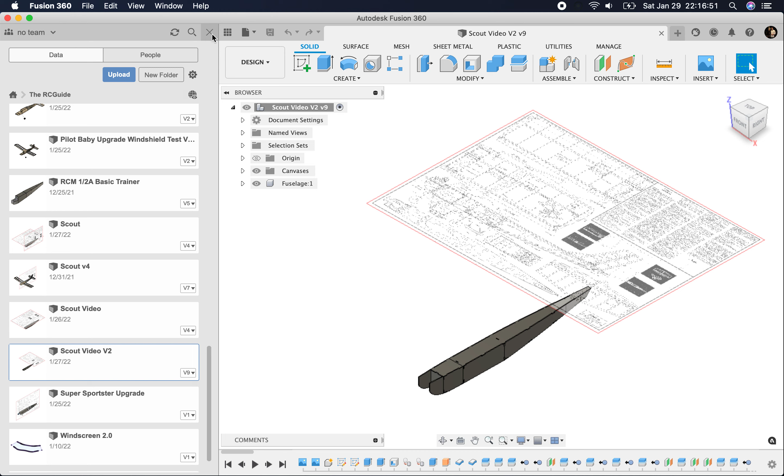Alrighty, we're gonna start working on the empennage here and go from there and move on progress in this little video.

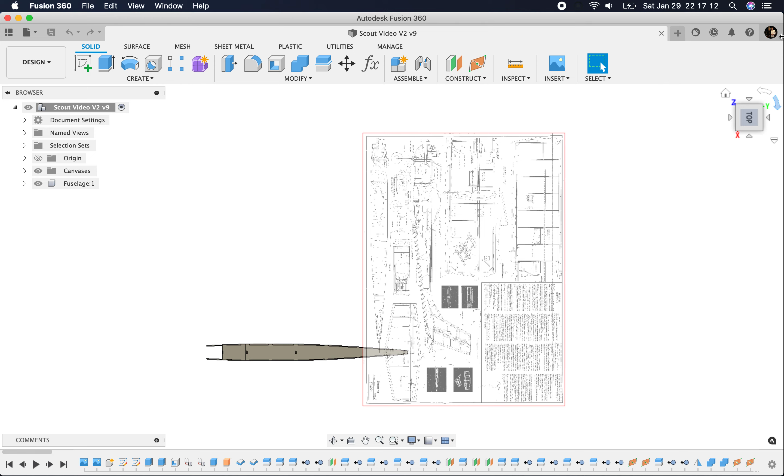Sorry I didn't make it last week. I had some things where I was a little under the weather. I hadn't gotten COVID, but a sinus infection nonetheless.

So I moved this canvas over just to get it lined up with where I want the horizontal stabilizer to be. And I'm going to create a new component up here by right clicking, click new component.

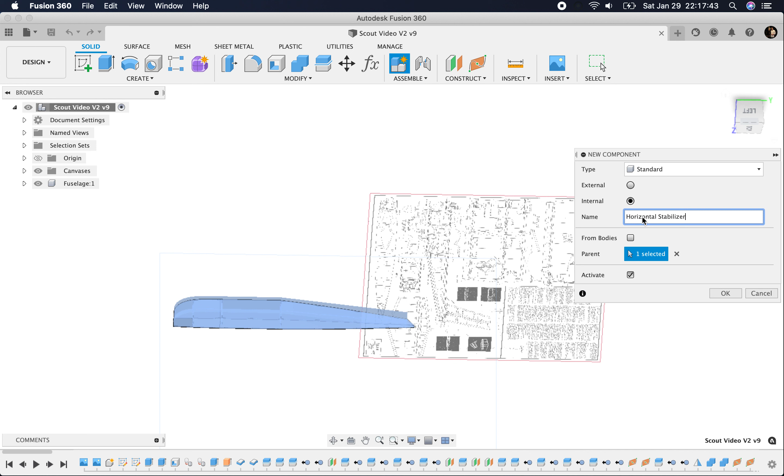Okay, and that's where we're at now. We have that selected. That's where we're going to go with this.

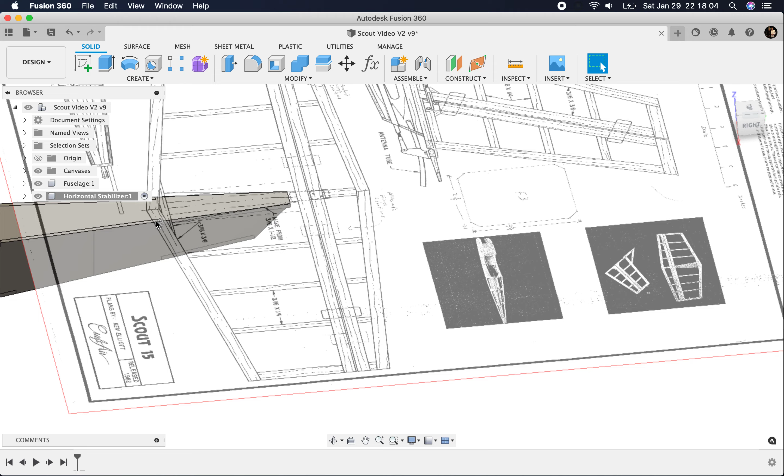Now, I did some things here a little prematurely. This tab back here in the back is actually going to get taken up by the stabilizer, so we'll have to come back and make some more tabs in here, but that's no big deal.

Alright, so I'm going to go ahead and create a sketch right here on this plane, this horizontal plane.

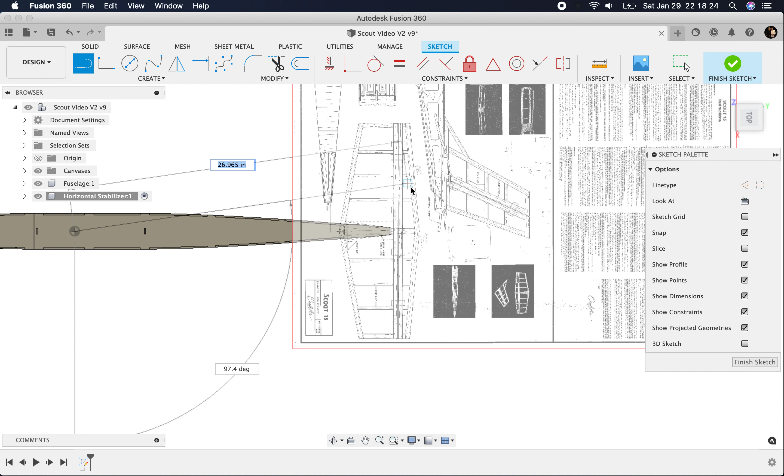First thing I want to do is draw a center line down the middle. Usually when I have symmetrical items, I like to have a center line to work from. We're just going to start our sketch. We really don't need the fuselage body here for this, so we can turn that off.

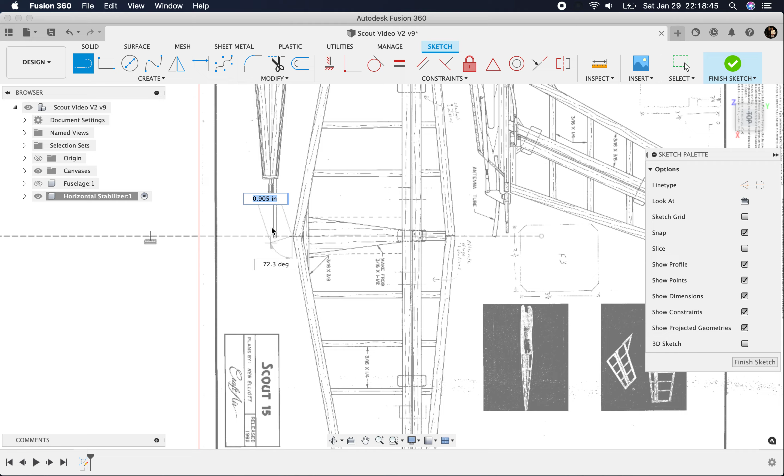Alright, and I'm holding down Command, or you can hit Control, I think, on the PC, because it doesn't always want to snap where I want it to.

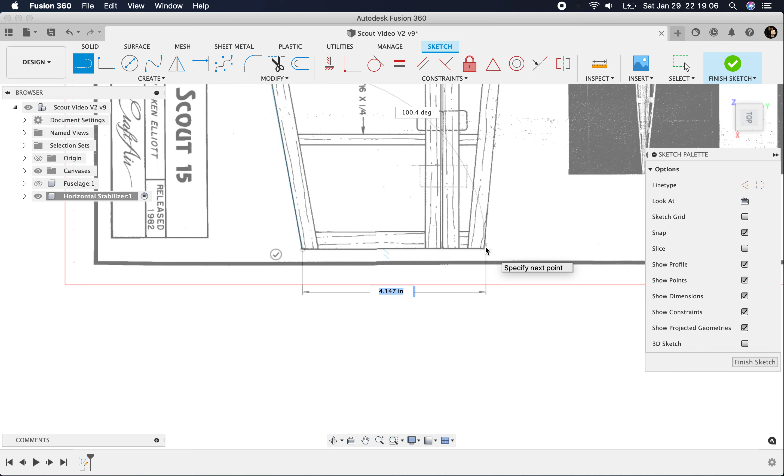Here we just want to go the line. It doesn't want to go where I want, so I'm going to go a little past it, and I'll come back and trim that. I think that's kind of what happened right here.

I got this new microphone, so hopefully it sounds a little better. It is definitely sensitive, that's for sure.

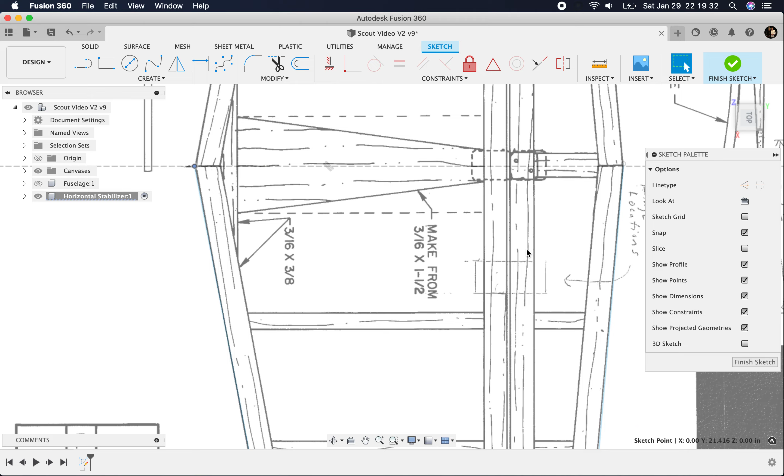Alright, and I'm going to draw this so that it has notches in the leading and trailing edges of the elevator and the horizontal stab, just to make it easier to build where you're assured that it's going to lock in. So I'm going to hit this offset tool.

Come in here and select that, and instead of what the plan called for was 3/8, I'm gonna go 1/2 inch. So you got to make that a negative. There we go.

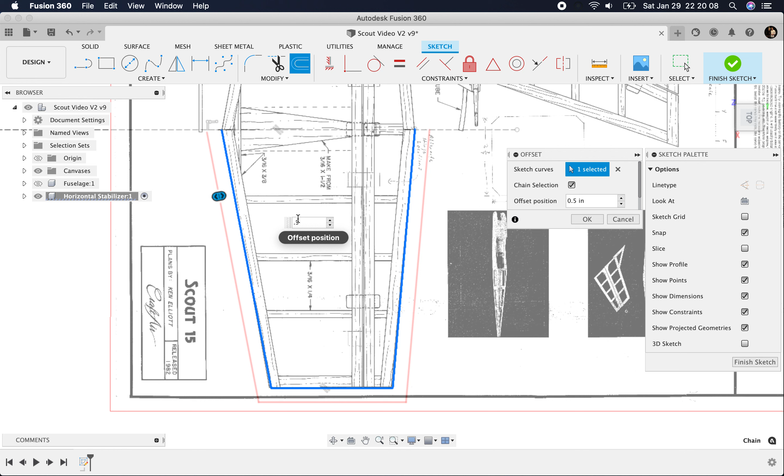And since this is going to the leading edge, usually it goes all the way to the end, so I'm gonna do that there also.

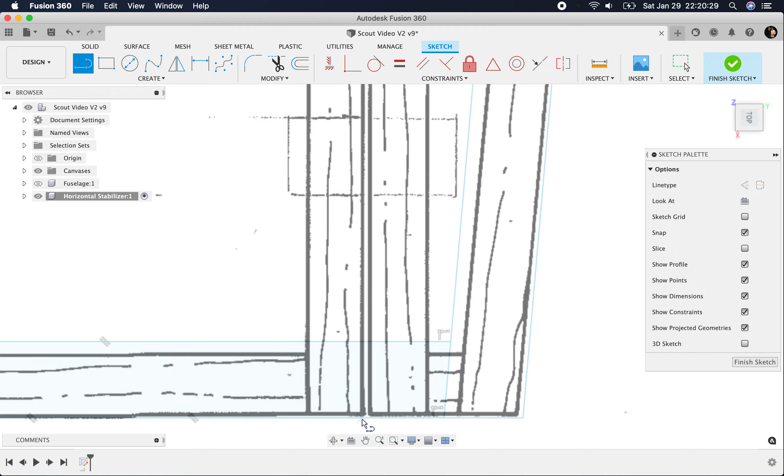And I'm going to come back in and put in our elevator hinge line. You can hear my fan heating up, coming up on my computer. And I'm going to do an offset here, and I'm just going to go 1/32.

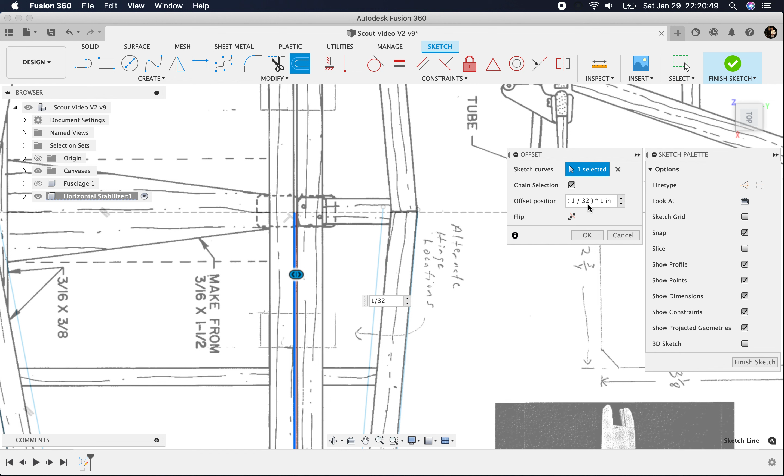And again, the nice thing about Fusion, you can put in fractions, you can put in decimals, you can put in inches no matter what your document settings are. Like mine are set to inches because, yes, I live in the USA. And you could set them however you want and still come back in and put in a different dimension.

Okay, so on the ribs, I want to go in a little bit. So I'm going to offset this again, and I'm going to offset this 3/8. Let's see here.

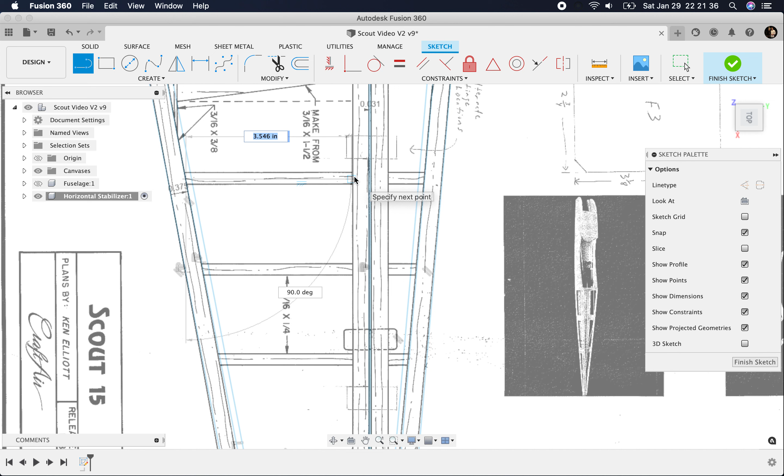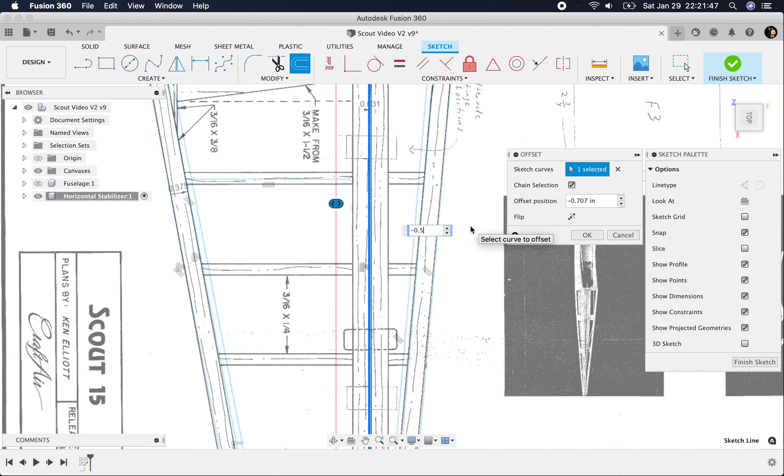Then what I'm going to do is I'm going to take the ribs to that line. I didn't do my offset back there. Make that 0.5. And that works right there.

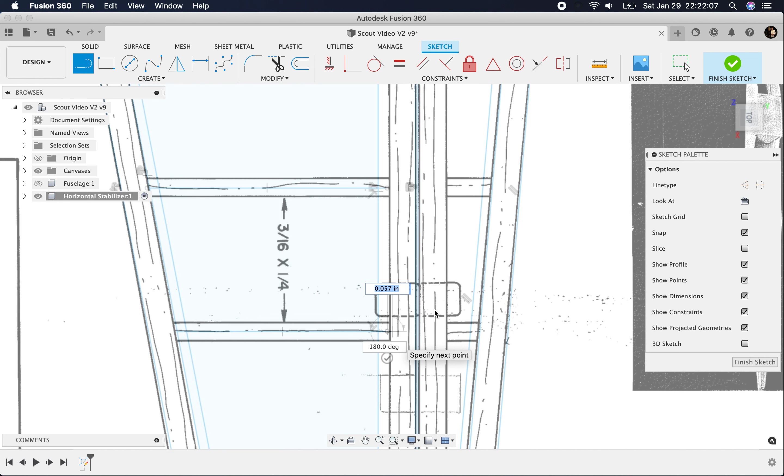And the ribs, I'm gonna do a thin extrude, and I'll show you. It's really simple, and for stuff like this, it's kind of handy. Let's come back in and go to there, that's good.

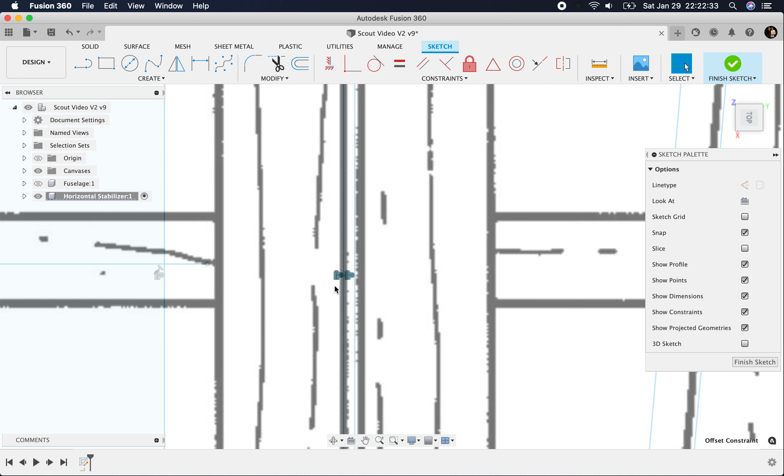And let's do an offset here. One of the things when you do an offset, it won't let you offset an offset line, so you have to break the relationship. You can right click on that, and I think it's here where you can say delete coincident, or you can just click on the little icon there and hit delete, and it is no longer associated with the one that you made it from.

So here we want to go 1/2 inch, and we'll do another offset, 3/8.

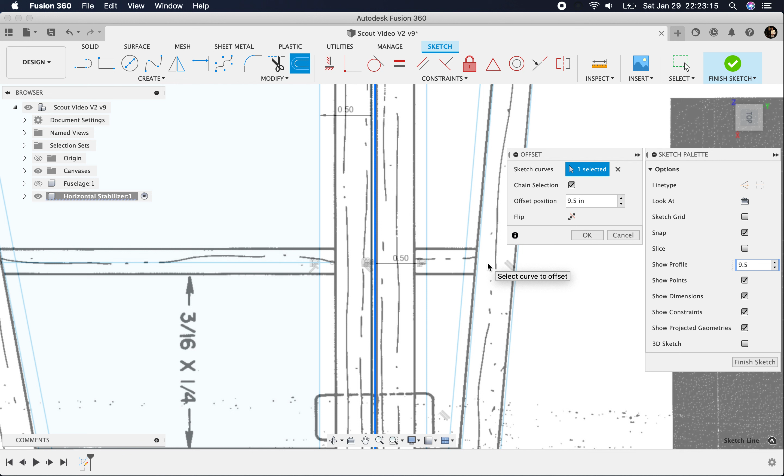Or for all my other people in the world, we'll make it 9.5 millimeters. Change this to millimeters. And that's pretty close to 3/8 for me.

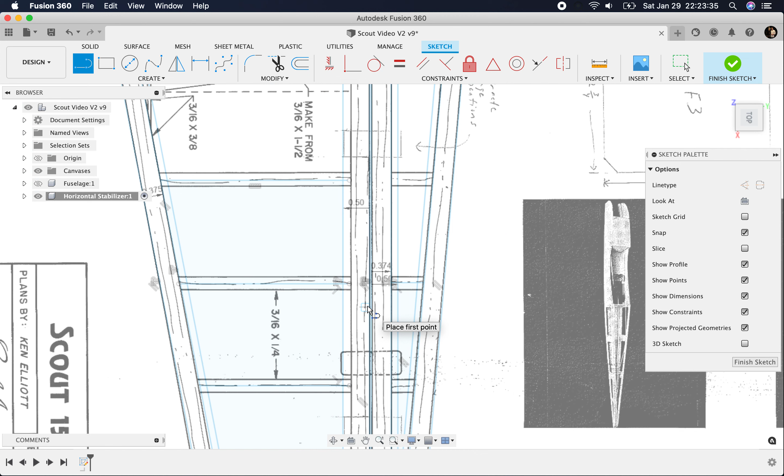And come on in here and draw this. Yeah, that's fine. I was going to say we could probably come from here to there, and that way we know we're lined up. There's just 3 of those.

We could have also done an offset or a rectangular pattern to create these ribs, and later on we may do that with other parts.

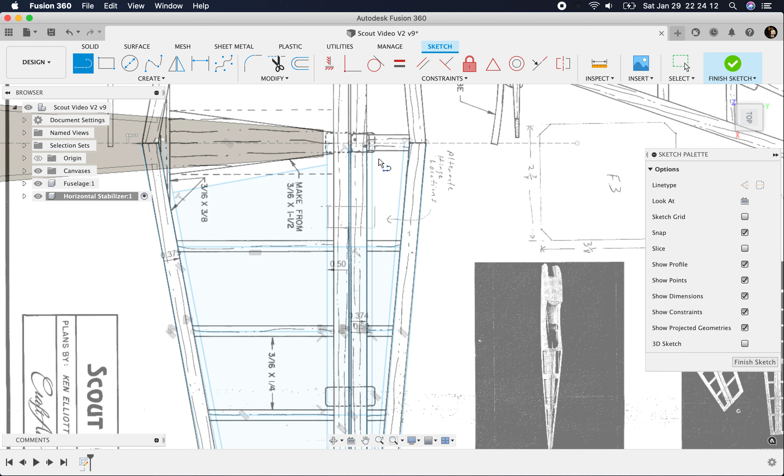Okay, so we just draw one side, and I need to draw this centerpiece. I'm going to do mine a little bit different. Yeah, I like to go a little bit wider just to be good, and I think I'm going to do a little bit different piece back here as well.

That's not what I wanted. It was close. Let's click there and there. Call that good.

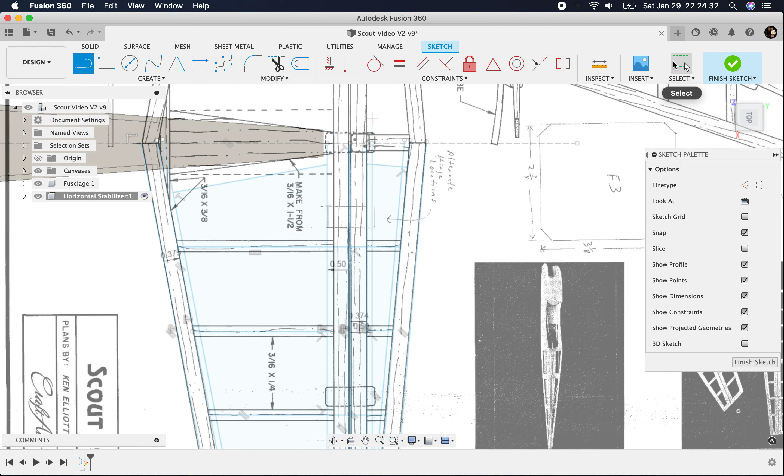And I want to extend this line into what would be our 3/8 line, like we did up here, or 9.5 millimeters. Negative.

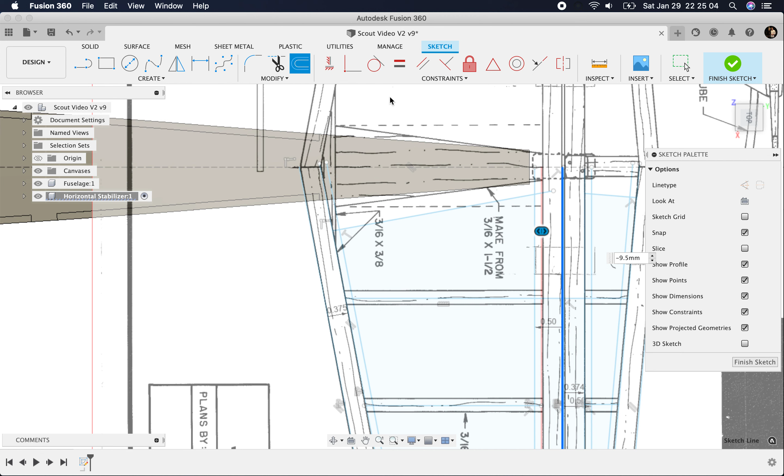I know a lot of CAD programs, once you set up your preferences, you can't go in there and change your unit of measure, but Fusion doesn't seem to mind too much.

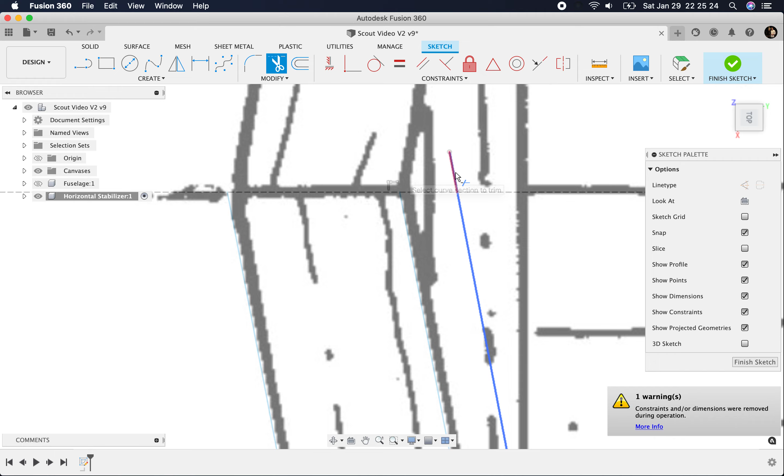Okay, what I want to do now is mirror all this. Let's trim these lines first, where they're hanging over our center line. Make sure nothing else is hanging over the center line. Here we go.

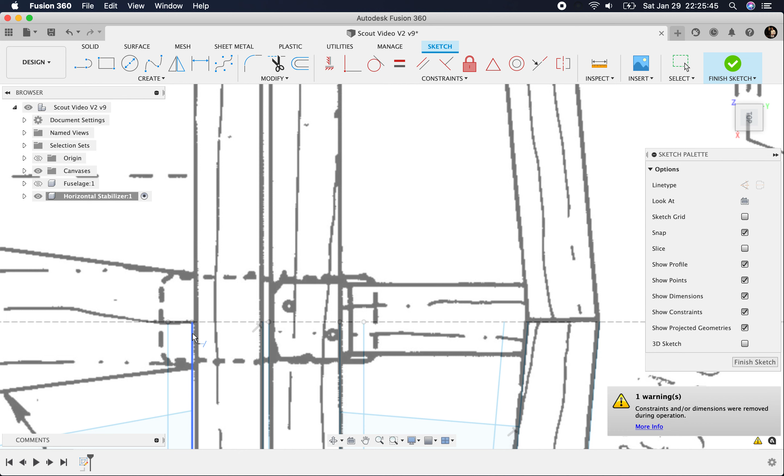And these are either too short or hanging over. Nope, that's not it. And normally when it's touching, you don't get the little point on there. Let's see what happens. So we want to select all of this.

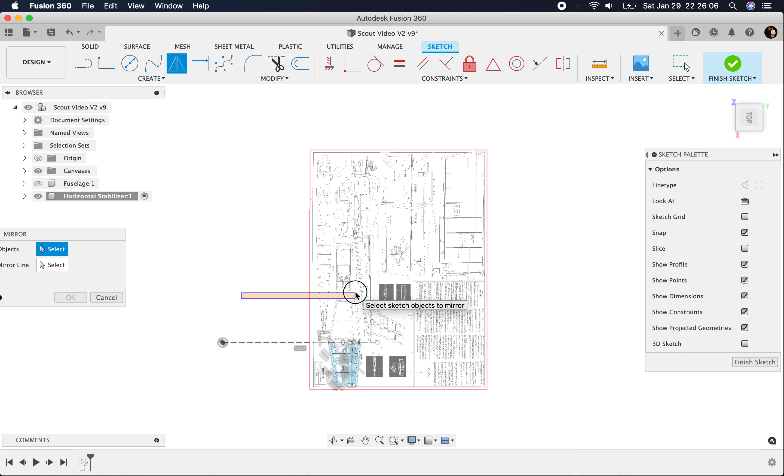Except for the center line. And our mirror is going to be that center line. And it looks like everything is closed, so that is what we want. So that's a good thing.

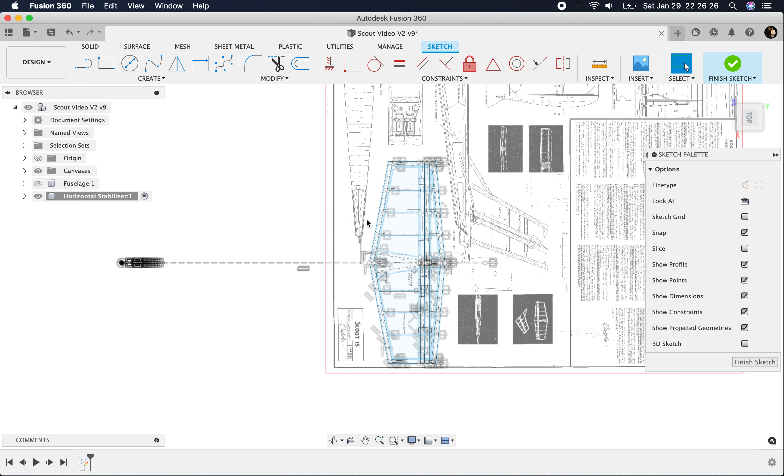Alright, we can finish this sketch. Now this is going to go below the surface of the fuselage. Right now it's on top, so we're going to go down 3/16 of an inch.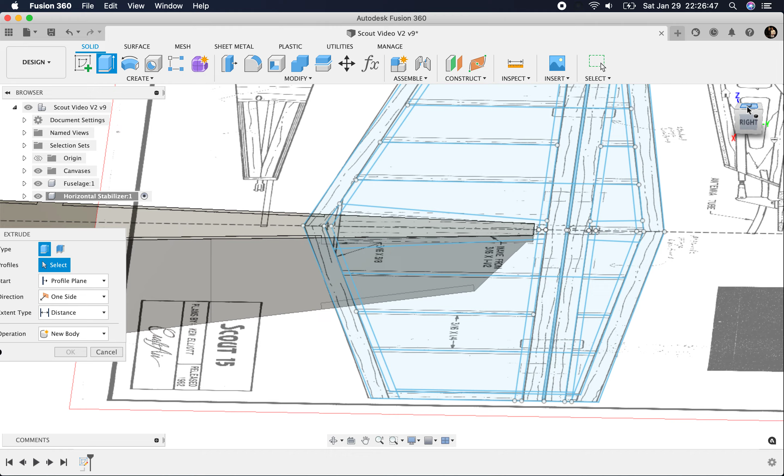So let's go to extrude. You kind of don't want to extrude all of it at the same time because you're going to end up with too many pieces connected.

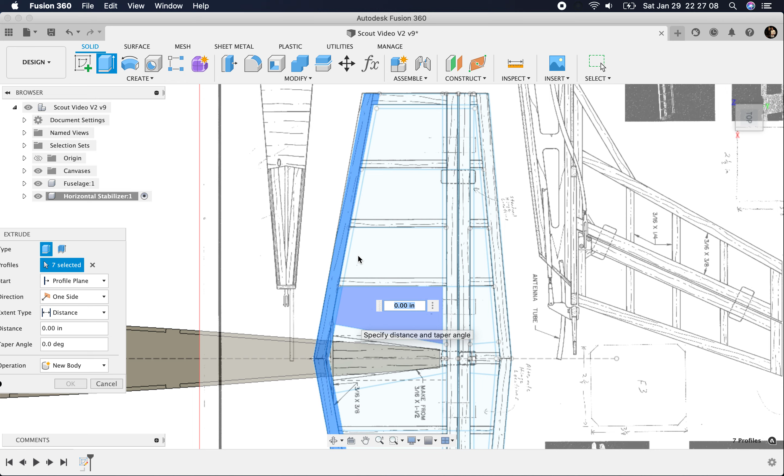I want you to notice where these drawings were not always symmetrical back in the day. So we could extrude that,

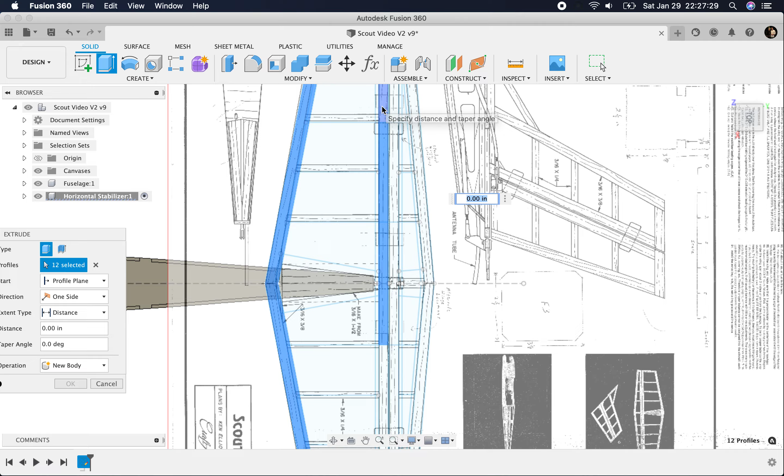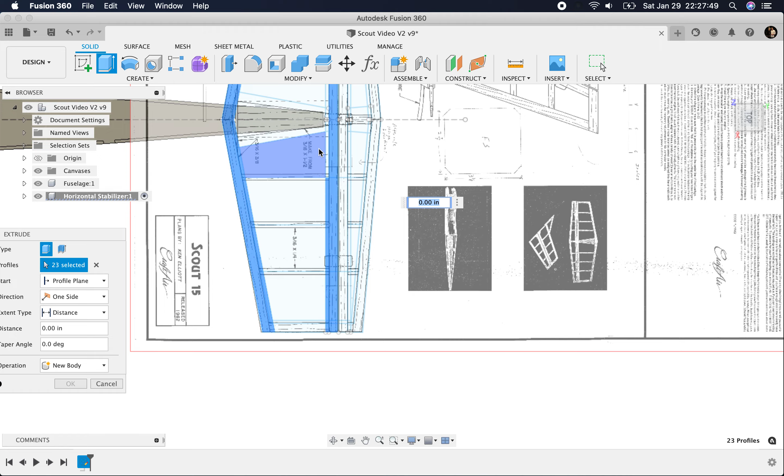this, and this is one of the reasons why, even though people say, hey, can you cut out this set of plans? I tend to like to redraw them before I actually cut them out, just to find mistakes. Because they're out there, trust me. Some plans and drafts people were better than others.

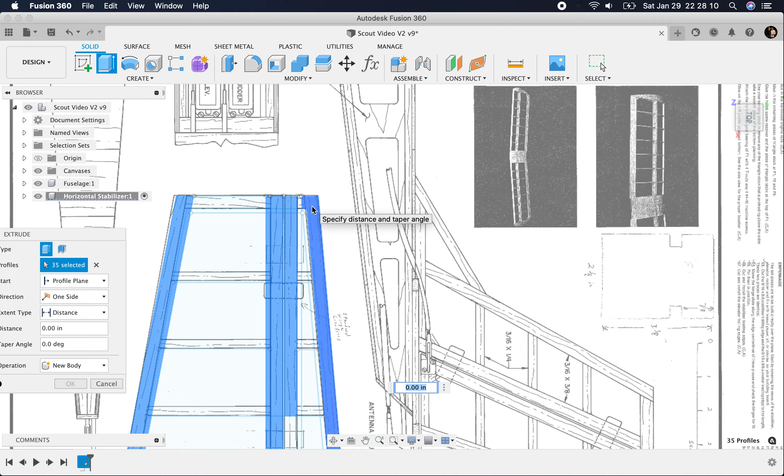Alright, none of that's touching. I can probably extrude this and that and that.

Yeah, drawing all those ribs. I could have come back and drawn them later, but that's okay.

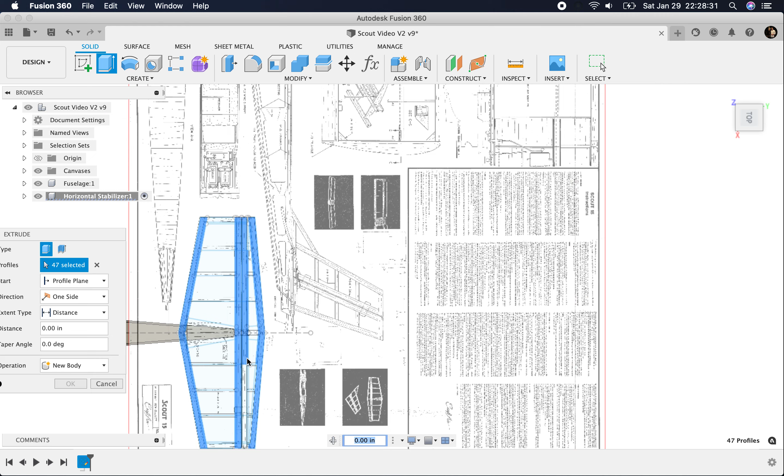Nope, I don't want that. Oh, I see where this is going to collide. We'll split that.

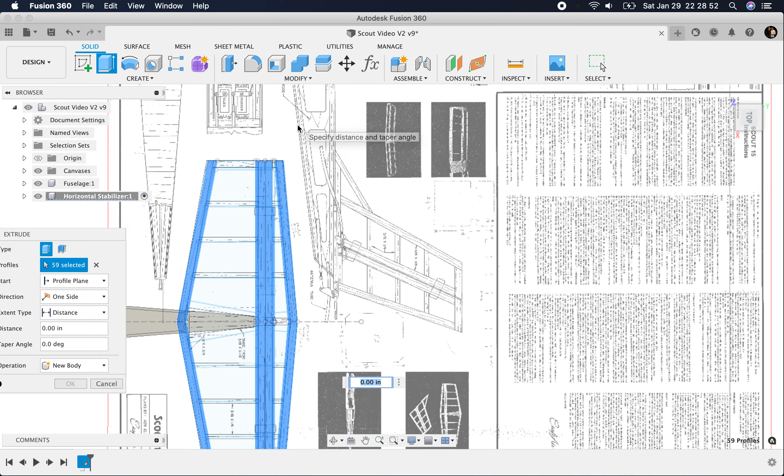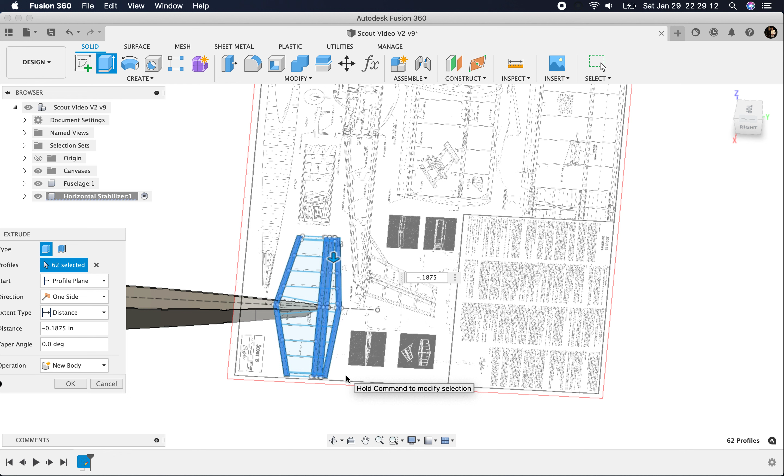Alright, more tedious than I wanted. Okay, so let's go down 3/16 of an inch, negative 0.1875. Let's turn the fuselage off because we don't want it connected to that.

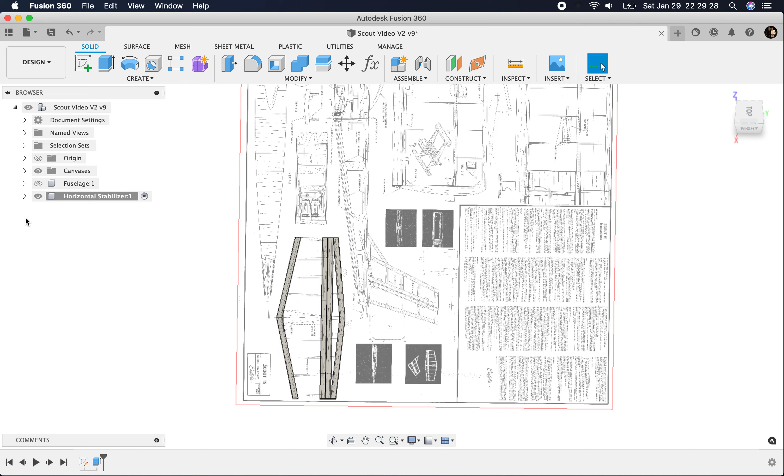And that should work. Okay, so let's bring our sketch back in. And I'm going to turn off all of these bodies because I want to extrude these other parts.

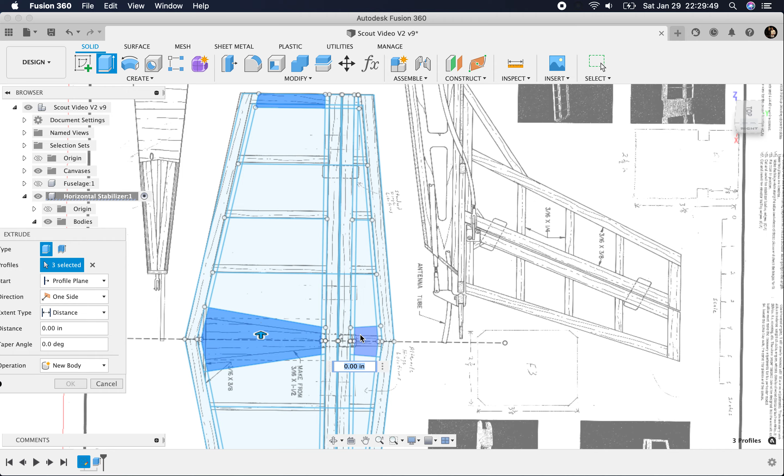That one won't have one. This one will. And I'm going to make this notch into those leading and trailing edges.

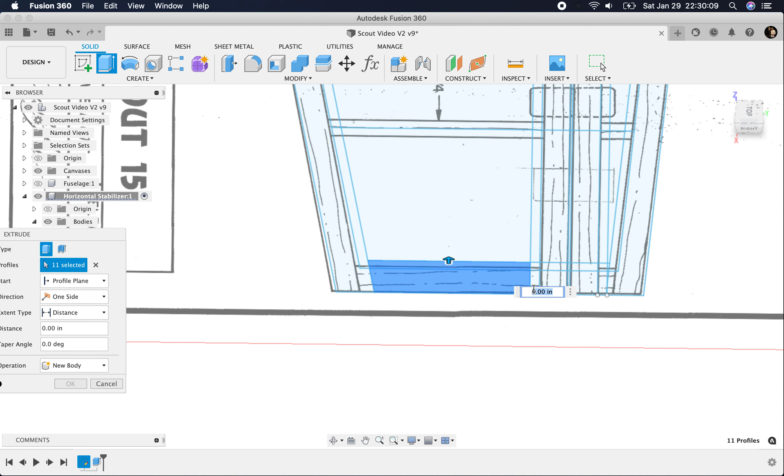Nope, I don't need that. Okay, negative 0.1875. And new bodies, click OK.

We'll come in and turn on these. And we have all that. And now for the ribs.

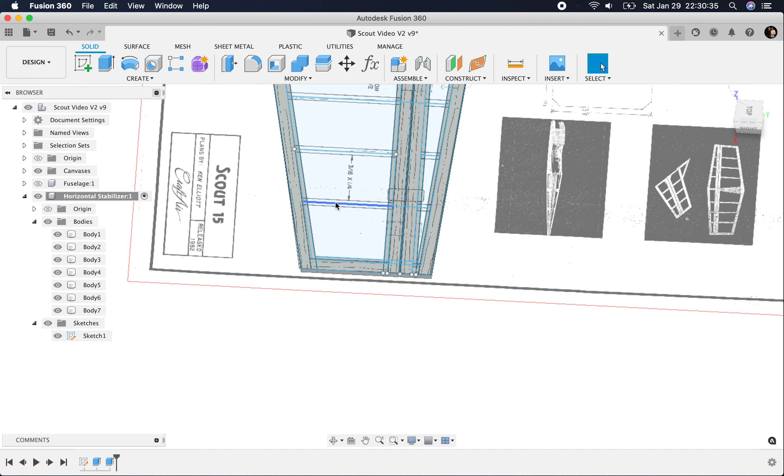Let's go grab that again. We're gonna select thin extrude. Then we can select our lines. Those are connected, I probably shouldn't have drawn them that way. Yeah, we'll make it work.

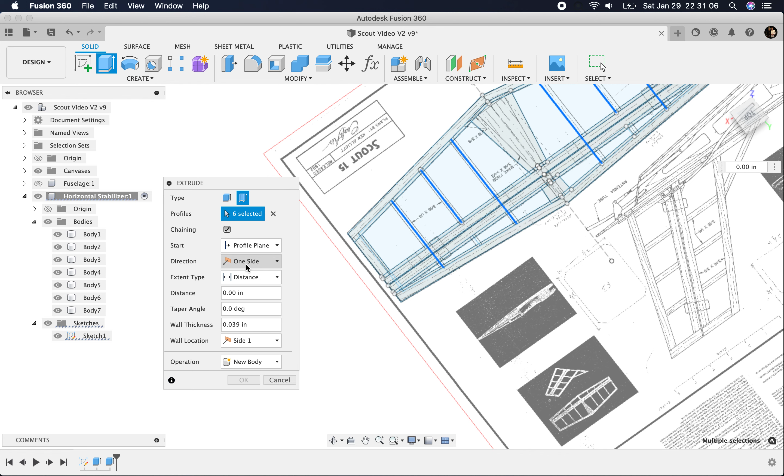Okay, so here we want to set the direction, of course, is going to be one way. We'll go distance because we're going to go, or we don't even have to go distance. We can just click the bottom of wherever we're going to go, and it's going to automatically extrude to that much. We want it to be a new body.

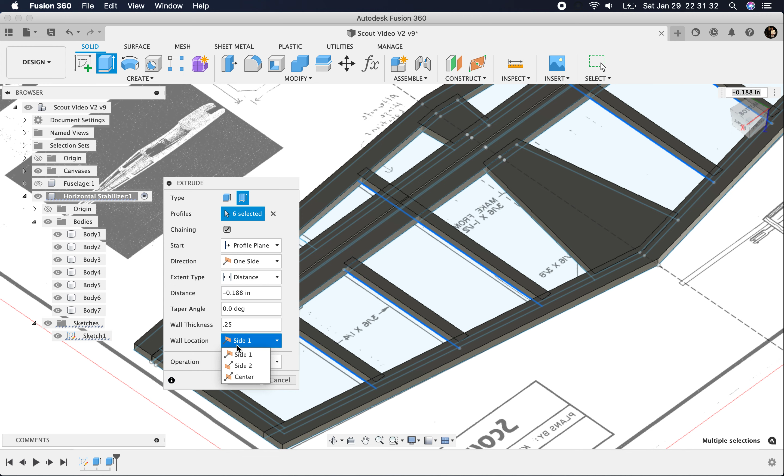We want the wall thickness to be 1/4, so 0.25, and we want the wall location to be in the center. So if you look at this, you see here's our line, and now it's in the center. If you change it to the side, it's going to go to one side or the other side, and here we're going to go center.

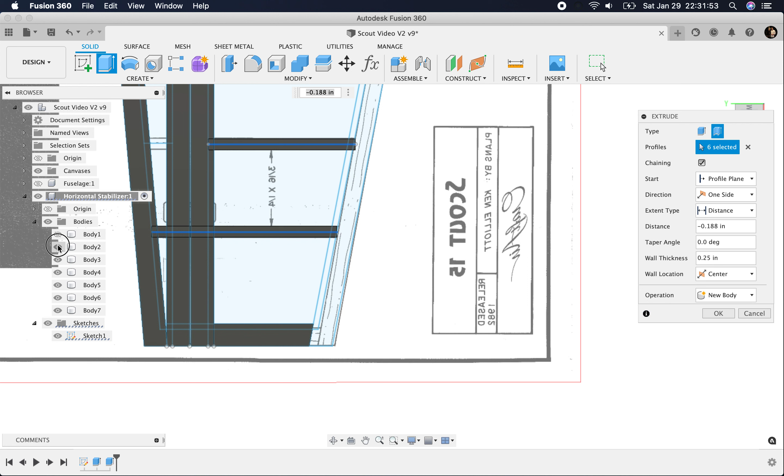And we're gonna make sure that's new body. Let's turn all this off. We also want that included. And this included. Okay, and hit OK. So there's our ribs, and on these we're going to trim these up.

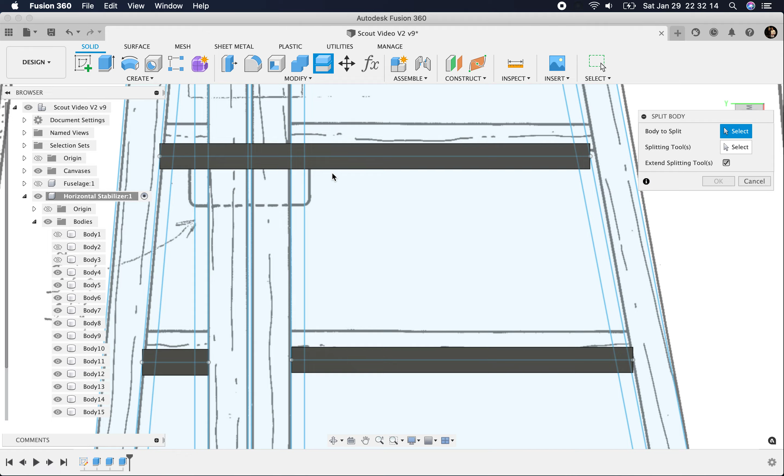I'm going to go to split body, and we'll split these bodies that got too long. And the splitting tool is going to be this line and this line. We're going to click OK.

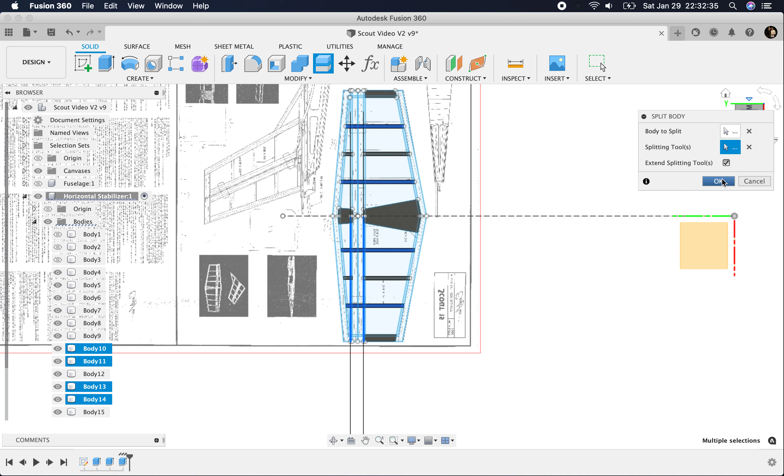Let's go and turn our sketch off. And we want to get rid of these extra bodies. Remember, we're going to remove, not delete.

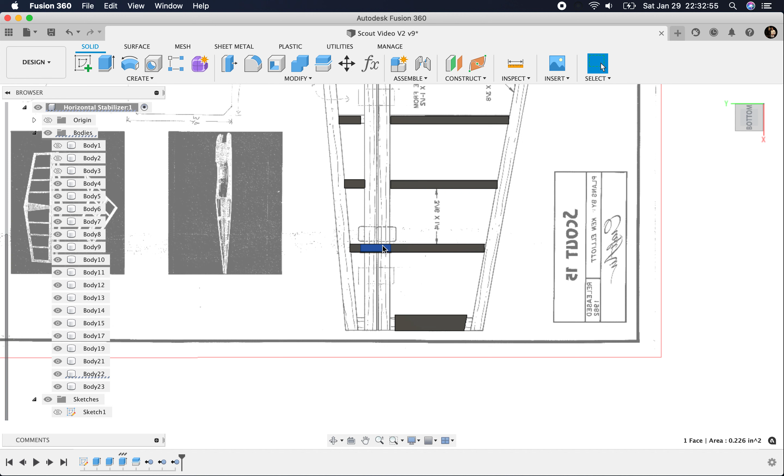I know which ones I'm clicking on because when I click on it, it gives me the little dash line down there. So we hit remove. For some reason that one looks short, so does that one, but that's an easy fix.

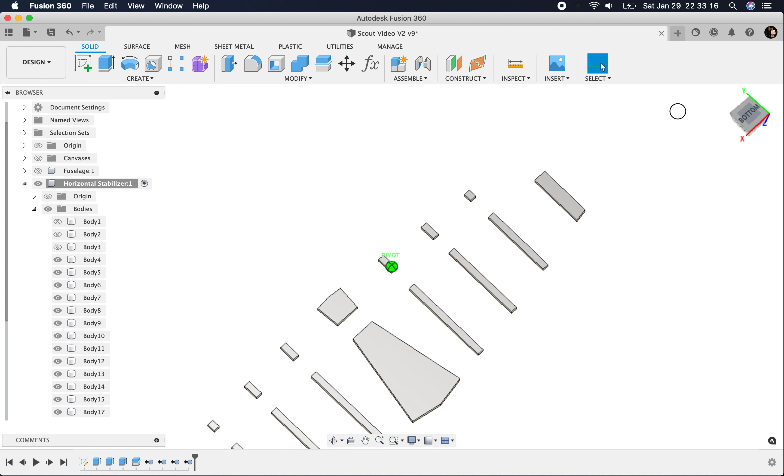Let me turn my canvas off. I'm going to go right here and extrude this face out 1/8 of an inch, 0.125, which is about 3 millimeters for some of you people, for the rest of the world I should say. And there we go, now those are all the right length.

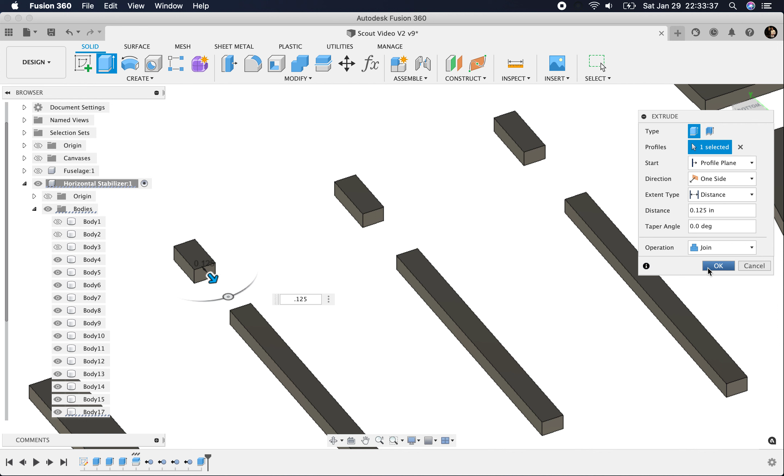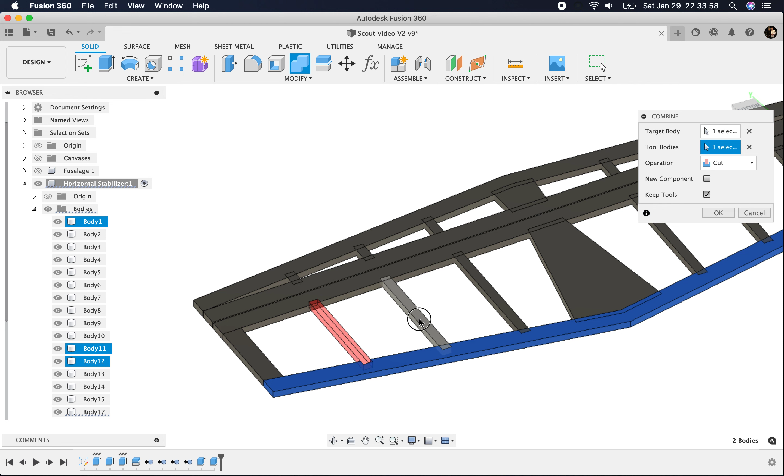Okay, you see how they're hanging over? So we're going to go up here to combine. We want to cut, keep tools. So I want to cut this with all of these. We're going to select all of these tools. And there we go, and you can do the same on these end pieces if you wanted to.

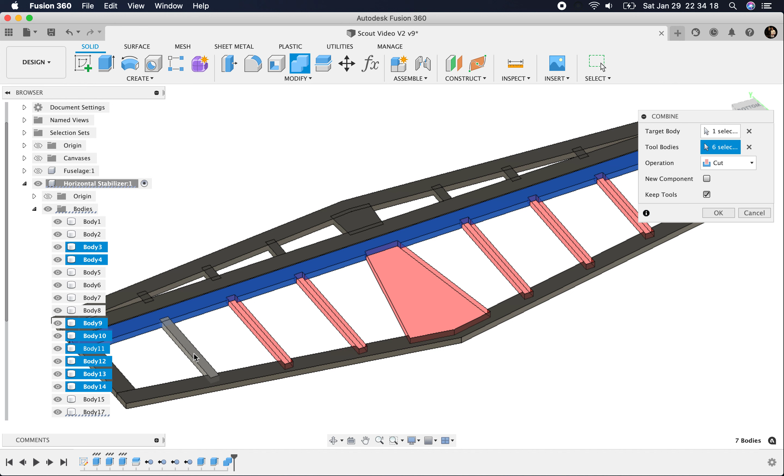That's up to you. I'm probably not going to cut this airplane out or build it. This was just a really good demo because it was simple and good clean lines.

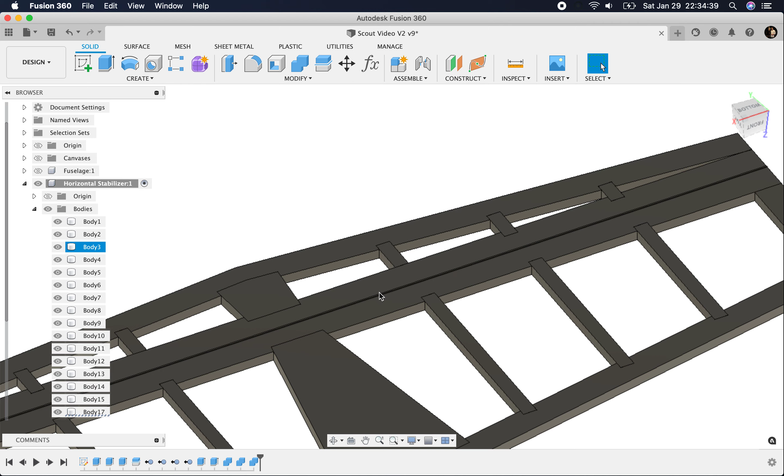And let's modify this. We want this to be the tool, this to be the tool. That one's short. This to be the tool. Okay, let's go in here and fix those shorties.

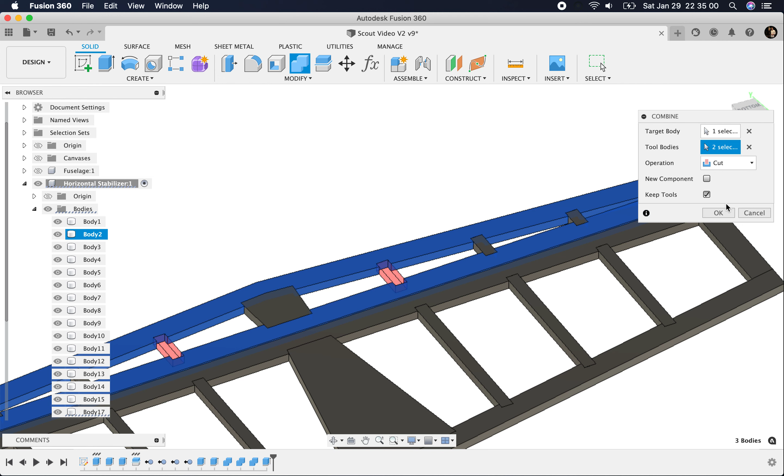Yep, let's do that combine operation once more. Alrighty, so there you have a horizontal stab. Now, I did not, in my cardinal rule, I did not fully dimension the sketch, but I've gone over that before, and so make sure you fully dimension those sketches.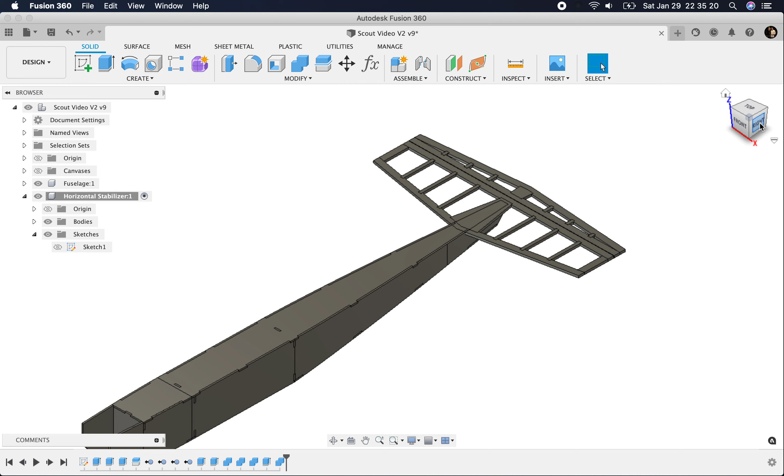Do as I say, right? Now we need to make this, we're going to cut this into the fuselage, so I'm going to hit combine, and first let's trim this. And the body we're going to trim it with is this one and this one. And that works.

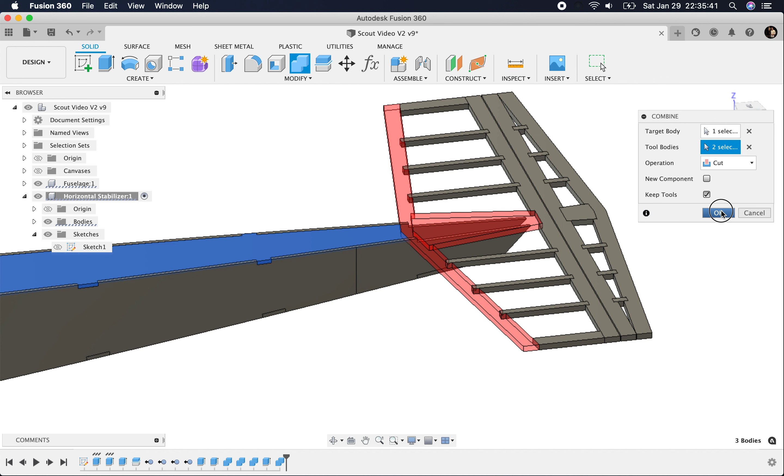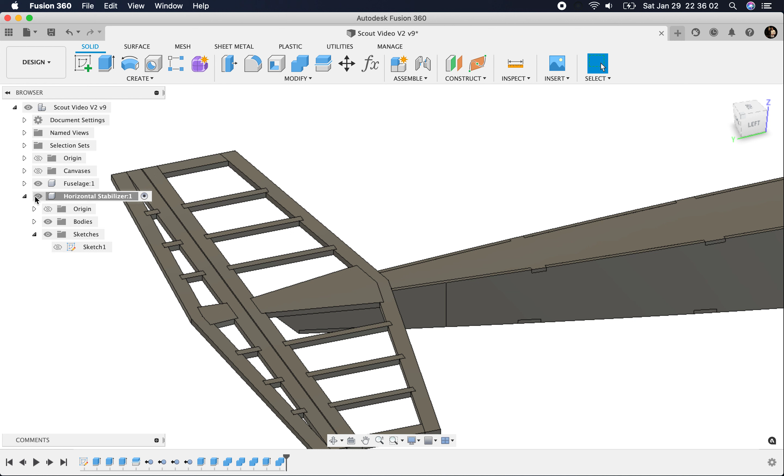And now let us do the fuselage sides with the same tools. Okay, so now if we turn the horizontal stab off, you can see we got a nicely notched top piece. We'll have to come in and put in some tabs. And we have this horizontal stabilizer.

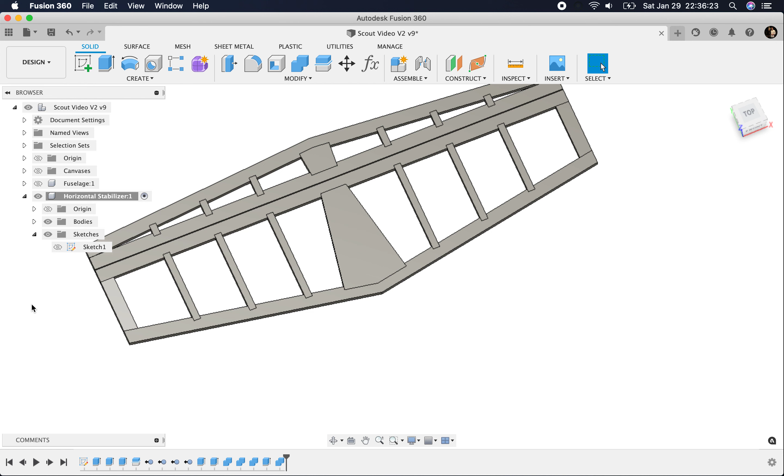Now, let's do one thing with this, because this leading edge is connected, and it's not supposed to be. Same thing with back here. So I'm just going to go split body, and I want to split all these bodies. Well, no, not that one.

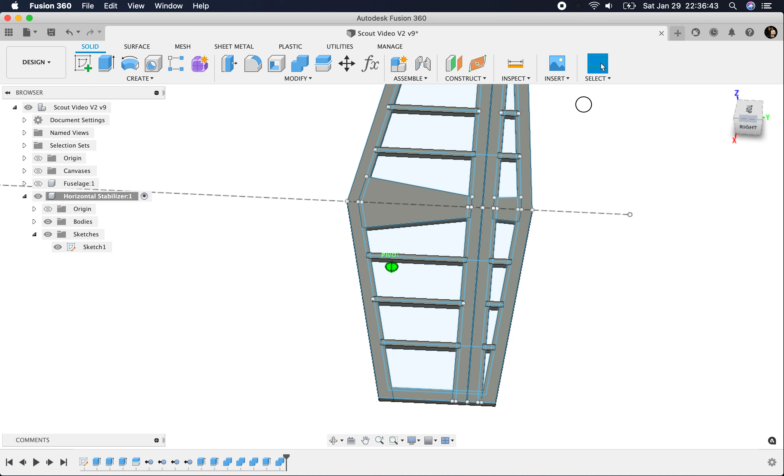Before we do that, I need to split this piece back here. See where they're tied together? So that's one piece that we don't want that to be.

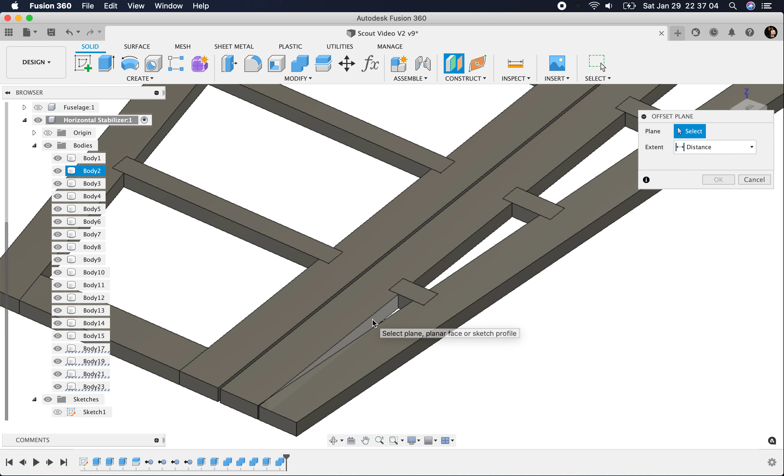Sometimes creating offset planes in different areas is really beneficial for doing stuff like this. And I'm going to create a plane just off of this flat side, and it goes straight across. So now when I go to split body, I'm going to use this plane as my tool. Let's turn that off, and you can see that we now have separate bodies.

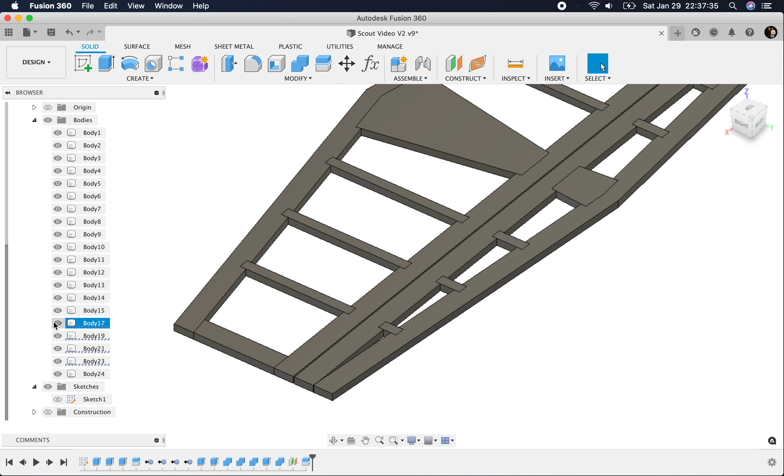Just like that. Okay, so now we want to split these two in the middle. So let's go back and turn the sketch on. Split body, we want to split this one and this one, and the tool we're going to use is that line that it won't let us use. That's okay.

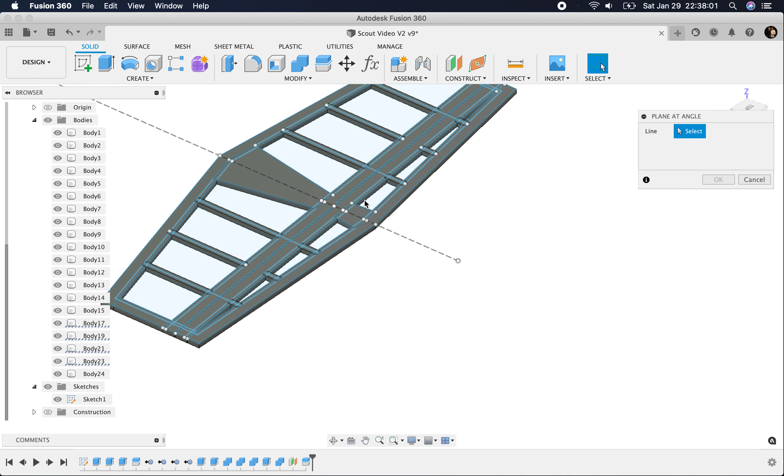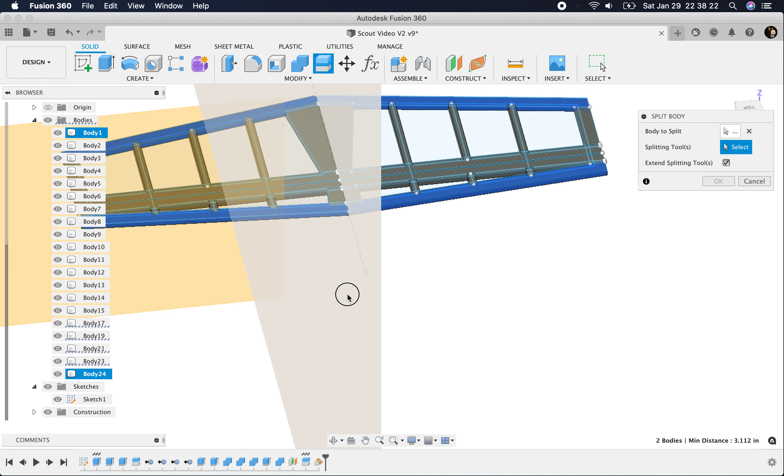I'm actually going to put a plane on that line, and to do that I do plane at angle, and let's make it 90 degrees. So now it's running perpendicular to our fuselage, or to our horizontal stabilizer. So like that, cut with that, and that should be it. Turn the sketch off, and there you have a horizontal stab.

And of course I recommend going in and labeling all these things so you know what they are, and it's better management. But for this video we've talked about that stuff, so no sense in hashing it out again.